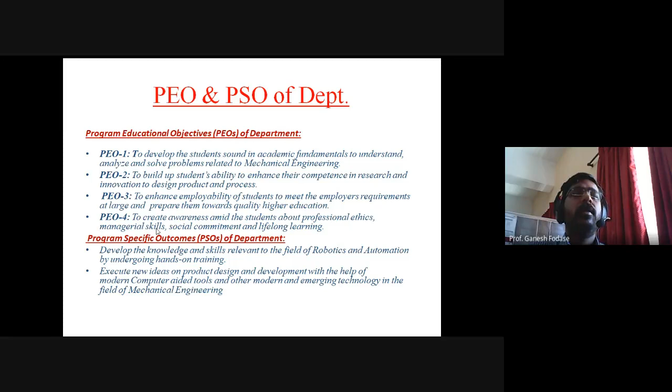There are 2 PSOs called program specific outcomes: to develop the knowledge and skills relevant to the field of robotics and automation by undergoing hands-on training. Second PSO is to execute new ideas on product design and development with the help of modern computer-aided tools and other modern and emerging technology in the field of mechanical engineering. So these are the PSOs and POs of our department.

These are the 12 program outcomes which are mandatory to all, specified by NBA. These all 12 outcomes an engineering graduate must have after completion of their 4-year engineering. The first one is engineering knowledge. The candidate must gain some engineering knowledge, problem analysis, design and development of solutions, so he must be able to design or develop something. Conduct investigation of complex problems - the student must be able to, or must have this knowledge, these outcomes.

Modern tool usage - he must be able to use some modern tools, different softwares. The engineer and society, environment and sustainability, ethics, individual and teamwork, communication, project management and finance, and lifelong learning. These are the 12 program outcomes.

Now we come to this. We'll start with the course introduction. The course is Theory of Machine 2, and the pattern of the course is 2015. The code of the course is 30-20-43. I'm going to take this for both divisions A and B.

When you talk about examination scheme, paper pattern for in-sem is 30 marks and end-sem is 70 marks. You must remember, up to second year you have online examination, but in third year you don't have any online examination - all examination is theory examination. First, there will be a 30-mark examination, that is in-sem, based on first 3 units, and then a 70-mark examination based on all 6 units, but weightage of the first 3 units is 20 marks, while last 3 units is 50 marks.

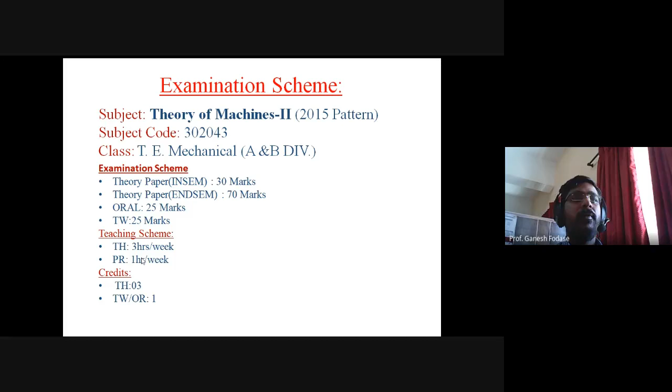In the university examination scheme, the oral weightage is 25 marks, external oral is there, and term work is for 25 marks. So total weightage considering examination point is 150 marks. Teaching scheme: there are 3 hours per week for theory and 1 hour per week for practical. You will gain 3 hours credit for theory, while 1 credit for term work as well as oral.

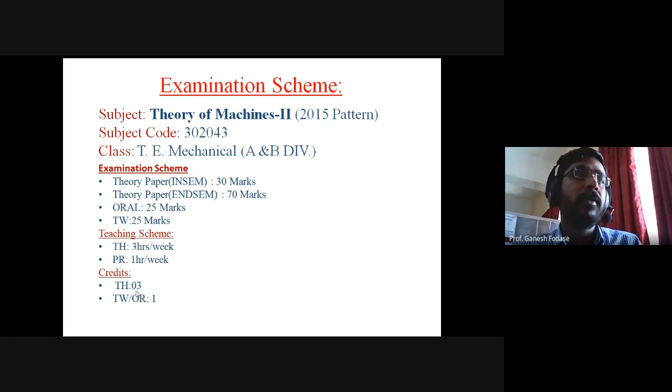Prerequisites for this subject: first, we must have strong knowledge of engineering mathematics, engineering physics, engineering mechanics, and theory of machines 1. How these subjects are useful to learn theory of machines 2, we'll discuss at a particular point. I will tell you the background of these subjects - math, physics, mechanics, and TOM 1. Also, this course is a prerequisite for subjects like DME 1 and 2 (design of machine elements), dynamics of machinery, and mechanical system designs.

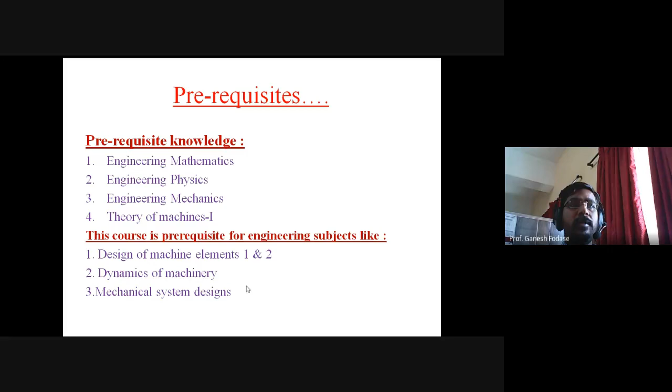While developing any course, there are some set objectives. As we are bound to University of Pune, we need to follow objectives designed for this course. This course has 6 objectives. The first objective is to develop competency in understanding theory of all types of gears.

To develop competency in understanding theory of all types of gears - the student must be able to understand theory of all types of gears. That is the first objective. Second is to understand the analysis of gear trains, and third is to develop competency in drawing the cam profile. The first two objectives are based on gears and gear trains, and the third is based on another mechanism called the cam profile.

The fourth objective relates to synthesis, to make students conversant with synthesis of mechanisms. The fifth objective is to understand stepless regulation, and the sixth is to understand mechanisms for system control like a gyroscope. Along with these objectives, we have some course outcomes.

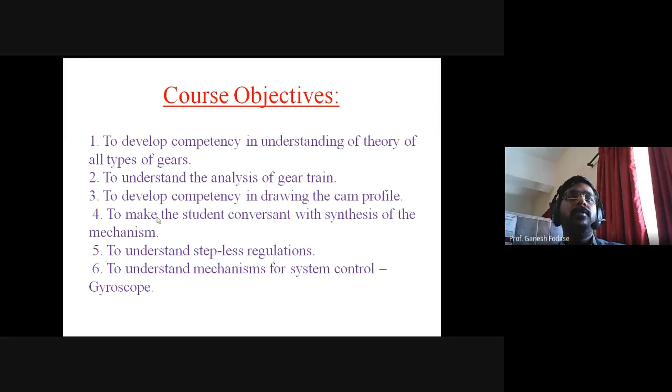There are 6 course outcomes. For each course outcome, I've mentioned in brackets which level of skill set the student will earn, based on Bloom's taxonomy level.

Course outcome CO1: to understand the fundamentals of gear theory, which will be prerequisite for gear design. The student must be able to understand fundamentals of gear theory. Then he must be able to perform force analysis of spur, helical, bevel, worm, and worm gear - applying the knowledge gained during these lectures.

So the first outcome is about remembering and understanding, and the second is about applying. The student will be able to remember and understand gear theory, and will be able to apply knowledge of gear trains for force analysis.

The third outcome relates to analyzing - the student will be able to analyze speed and torque in epicyclic gear train, which will be prerequisite for gearbox design. This is related to analysis of gear trains.

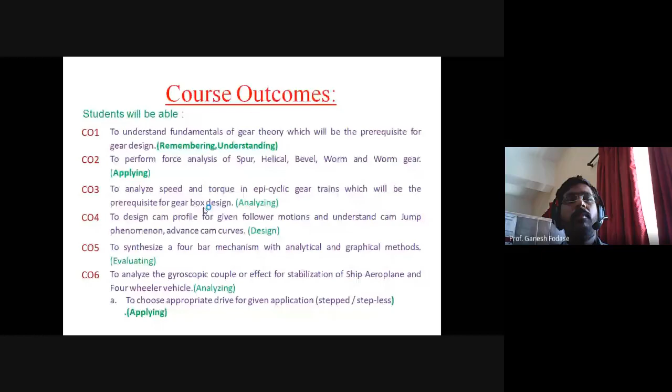The next outcome is to design cam profiles for follower motions and understand cam jump phenomenon as well as advanced cam curves. So the fourth outcome relates to design of cam followers, understanding cam jump phenomenon, and designing advanced cam curves.

The fifth outcome relates to evaluating - to synthesize the mechanism with analytical and graphical methods, so the student is able to evaluate these methods.

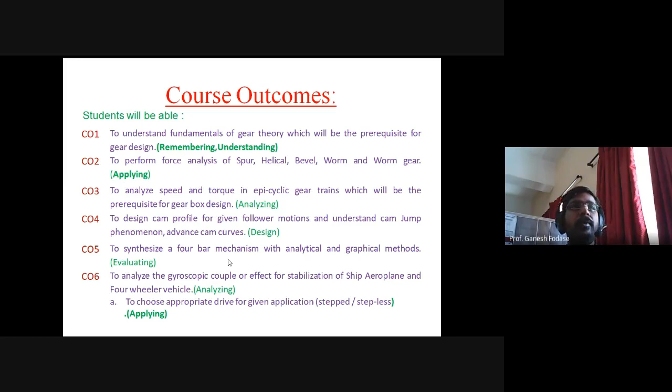The sixth outcome involves analyzing and applying - to analyze a gyroscopic couple or effect for stabilization of ships, aeroplanes, and 4-wheeled vehicles. Students must have knowledge of gyroscopic couples and their effect on stabilization of ships, aeroplanes, as well as 4-wheeled vehicles.

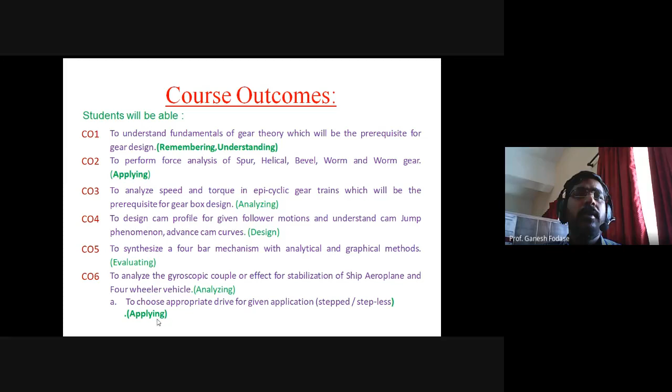Another outcome involves applying the appropriate drive for a given application, whether stepped or stepless. This is the CO-PO mapping table, which is not that relevant for students.

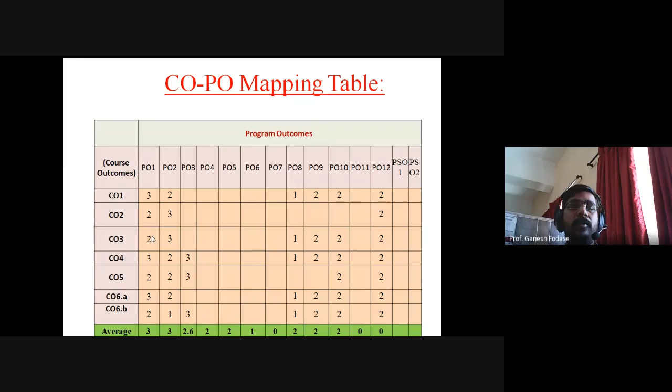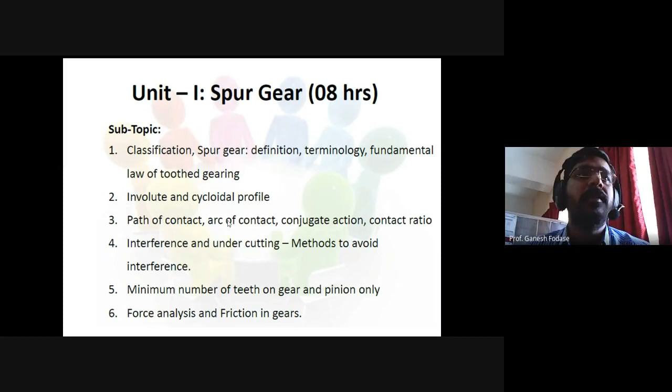This is the syllabus of unit 1, which covers terms and analysis of spur gears - first introducing classification, then terminologies, definitions of involute, cycloid, conjugate profile, path of contact, arc of contact, conjugate action, interference, undercutting, and finally force analysis and friction in gears. The weightage is 8 hours. Unit 2 relates to other gears like helical, bevel, worm, and worm wheel, covering force analysis and terminologies, with a weightage of 6 hours.

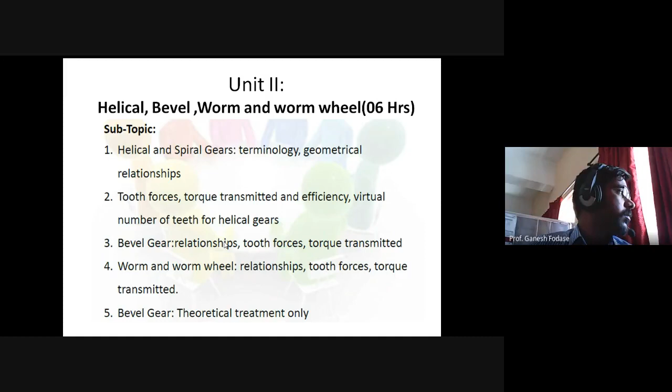Next is gear trains.

In gear train, we are going to discuss types of gear trains, analysis of epicyclic gear trains, and holding torque. We will study different types of gear trains and their analysis, with more focus on epicyclic gear train.

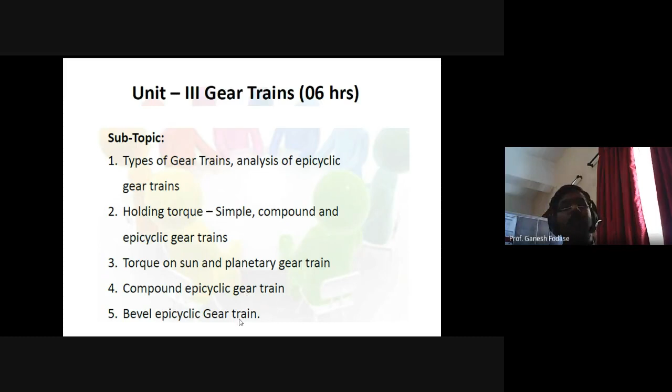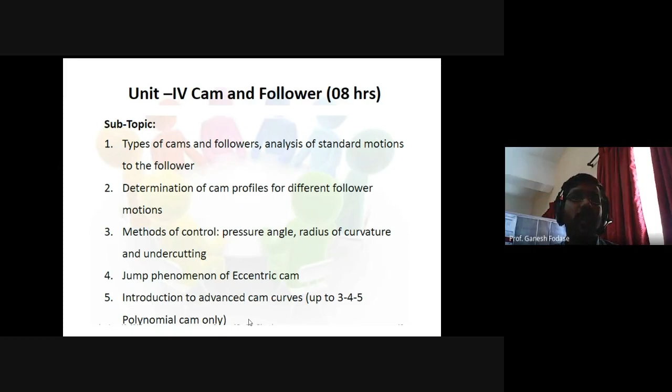In the fourth unit, we are going to study cam and follower mechanism, its design, different types of cams, different types of followers, different phenomena related to cam and follower, and how to draw cam follower profiles, along with some advanced cam curves introduced at the end of the unit. Also the weightage data again.

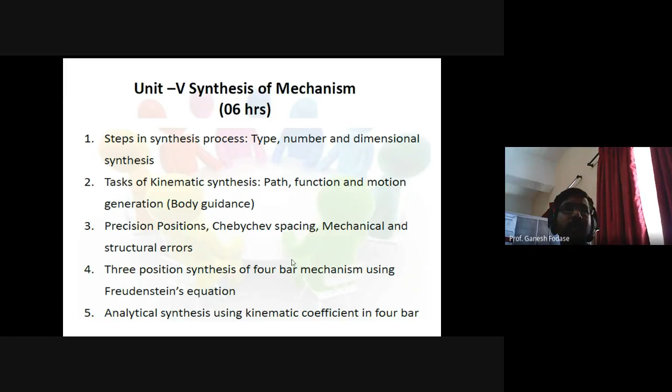So the next unit is synthesis of mechanism, which consists of only analytical methods. Graphical methods will be discussed in practical, and the time weightage for this unit is 6 hours. Then the last unit is a combination of stepless regulation and gyroscope.

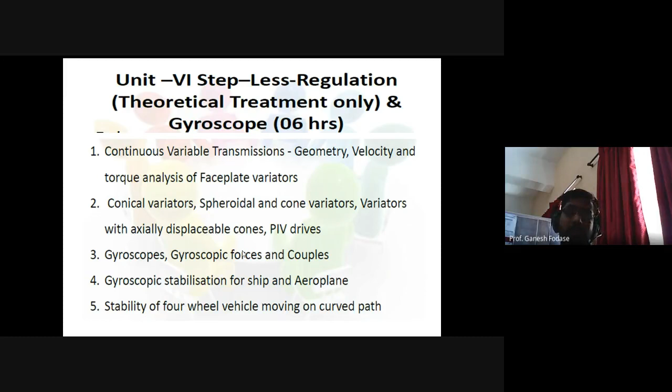Stepless regulation consists of only theoretical treatment like CVT and IVT, and finally gyroscope - its effect, its couple, and then its application for ships, aeroplanes, and four-wheel vehicles.

This is all about the theory part. Now in the practical portion, we need to cover 7 compulsory practicals. This is the list of practicals we need to cover.

The first practical is mostly about how to draw an involute gear tooth profile with the rack cutter. Then a practical related to manufacture of gear tooth profiles - not actually manufacturing, but we are going to plot and draw gear tooth profiles with the help of a rack cutter.

Second one is kinematic analysis, a self-study practical of synchromesh, machine tool gearbox, or differential gearbox. Third one is speed torque analysis of epicyclic gear train.

This is also a performance practical, in which we have one setup for epicyclic gear train, and on that setup we are going to find out speed and torque analysis.

Fourth one is to draw cam profile. The sheets are there, and we are going to design different cam profiles based on the input given. This one is also based on sheets.

Here we need to synthesize a four bar mechanism. As I told you in the theory portion, we discuss only analytical methods, but here in the practical session we will discuss graphical methods too.

Sixth one is related to gyroscopic effect. We are going to verify the gyroscopic effect with the help of the apparatus we are having.

Seventh one is to study continuous variable transmission and infinite variable transmission. So study of CVT and IVT is the practical. If you see here, there are some study practicals, some sheets, and some performance-based practicals. This is the compulsory set of 7 practicals.

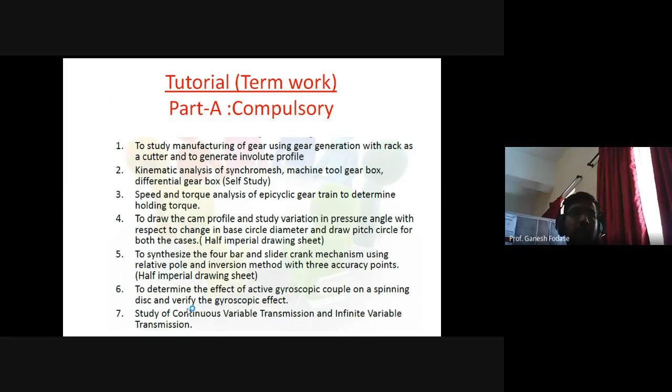Along with this part A, we have some practicals in the list given by the university. Out of this, we need to complete at least 2 practicals. So 7 plus those 2, total 9 practicals we need to perform compulsorily.

This consists of: draw a conjugate profile for a general type of gear tooth, verify cam jump phenomenon, synthesize a four bar mechanism based on Freudenstein's equation using any programming language, measure the range of speeds obtained by any one type of continuous variable transmission device, and industrial visit to understand machines and mechanisms. Out of this, any 2 we need to perform.

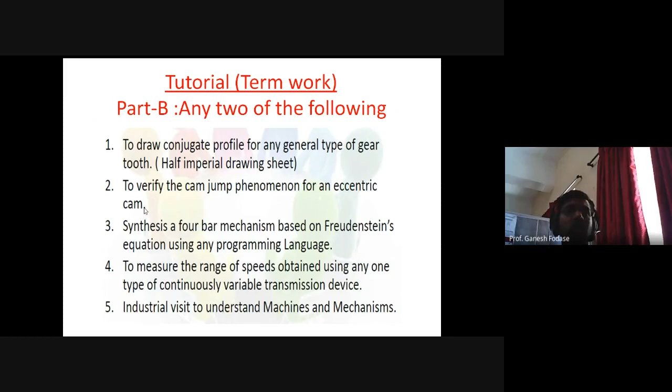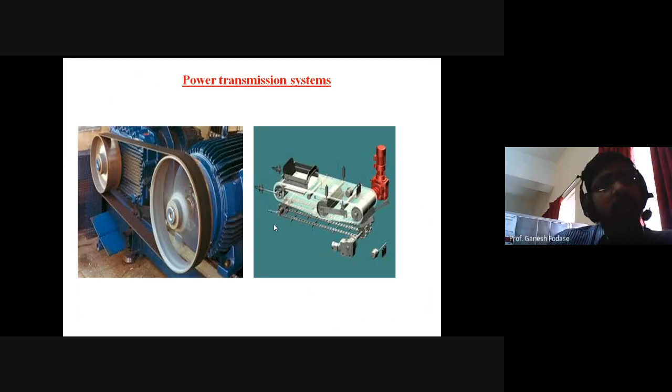In this introduction lecture, we will also discuss briefly about gears. So before starting with gears, we'll look at power transmission systems. If you need to transmit power between two shafts, let's say from shaft 1 to shaft 2, there are different options, different alternatives available.

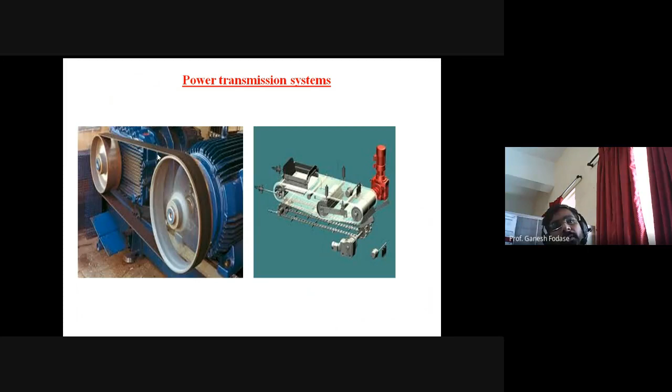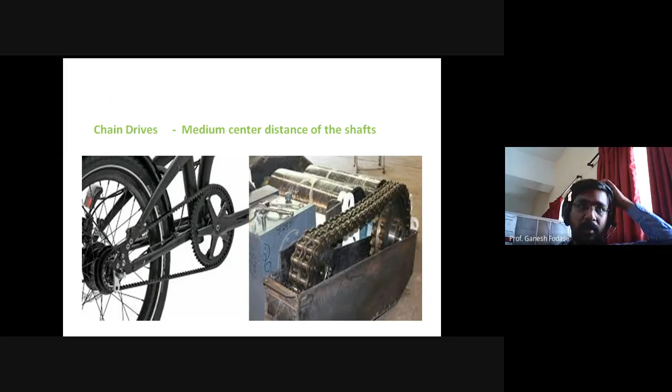That alternative is selected based on the distance between the shafts. If the distance between the shafts where I need to transmit power is more, then we generally prefer systems like belt and conveyor. If large central distance is there, we prefer belt or rope drive. If the central distance between the two shafts is medium, then we may prefer chain drive. So chain drives are used for a medium central distance of the shafts.

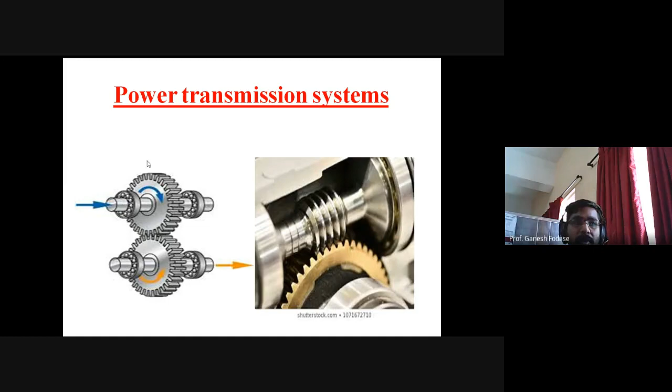And if the central distance between the two shafts where we need to transmit power is too small, we prefer gear tooth or gears. You can see in the diagram, two shafts having very small central distance are joined using two gears. In the first diagram, these are spur gears, while another type is worm and worm gear. We'll see this gear in detail in the next lecture.

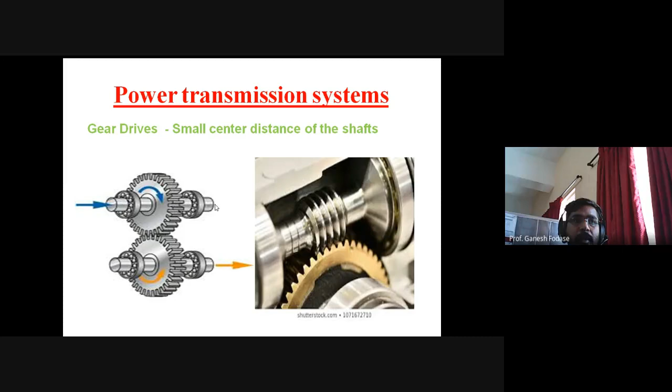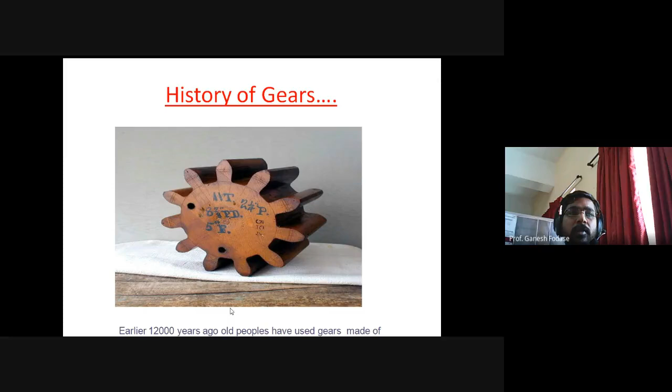So this is all about how gear drives, chain drives, or belt drives are used to transmit power. Now let's see the history of gears. These gears have been used from old ages - about 12000 years ago, people used gears made of wood to operate mechanisms for driving doors of temples and caves.

Before gears were derived, people used friction discs to transmit power. The problem with this disc is that it should rotate in the opposite direction, and slip may occur. To avoid the slip problem, we use gears to transmit power. Gears mean we just make additional projections on the periphery. So we can call a gear a disc only, but with projections cut on its periphery. It is the next advancement of the friction disc, used to avoid the slip problem.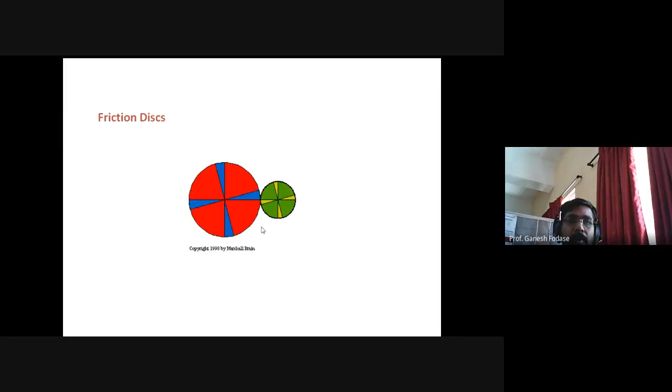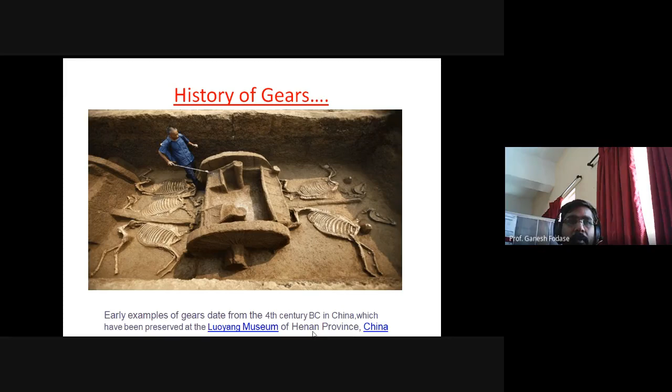This is one more example related to the history of gears. This shows an early example of gears dating from the 4th century BC in China, which have been preserved at the Luoyang Museum in China. So you can see these gears were used in the 4th century.

But here's one more example. The earliest preserved gears in Europe were found in the Antikythera mechanism, an example of a very early and intricate geared device designed to calculate astronomical positions. Its time of construction is now estimated between 150 to 100 BC. You can see this old gear, but it was used in that era, between 150 and 100 BC.

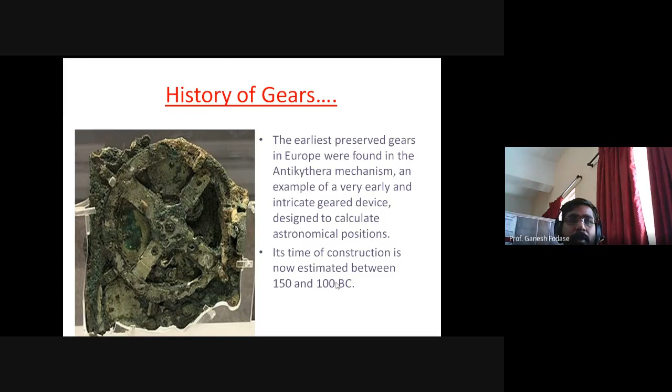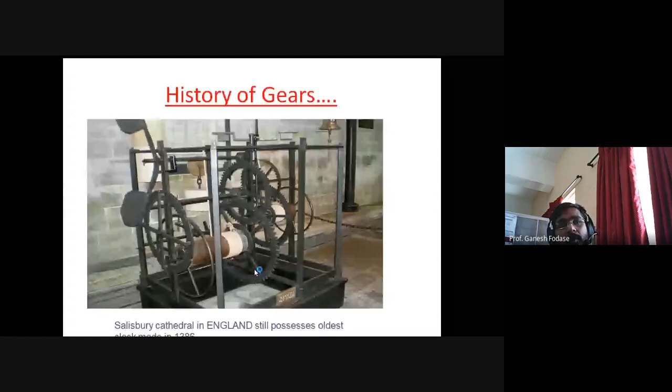You might have seen some clocks on old buildings - old clocks basically use gear mechanisms. You can see this one used to drive a clock mechanism; many gears are present. This is the Salisbury Cathedral in England, still having its oldest clock, made in 1386. This is the mechanism used to drive that clock. You might see this kind of clock many times - toothed gears were used in clocks on buildings in the Middle Ages to operate their mechanism.

This is all about the history of gears. In the next lecture, we'll discuss classification of gears, gear terminology, fundamental law of tooth gearing, interference-free gearing, concept of path of contact, arc of contact, interference, undercutting, and finally minimum number of teeth on gear and pinion, and then force analysis of gears. This concludes the first lecture. Thank you.